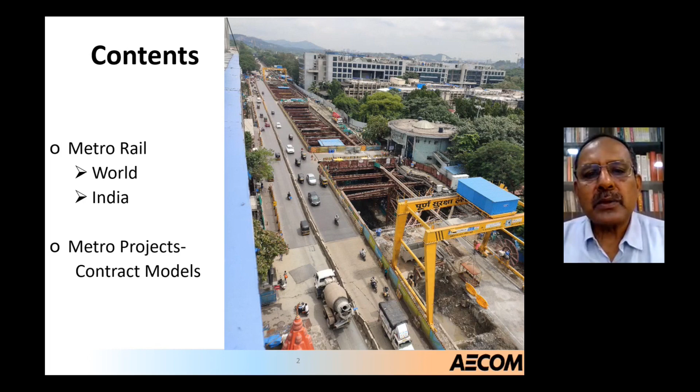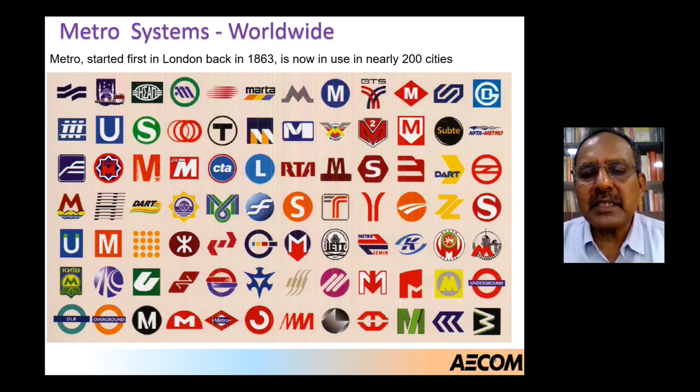So these are some of the logos of various metros. You can identify some of the logos which are very familiar to you. So this is Hong Kong Metro, MTR. This is Kowloon Canton Rail Corporation; now it has also merged with MTR. This is RTA Dubai. This is DMRC, or Delhi Metro Rail Corporation. This is the famous tube underground, London. This is overground, again London. So these are various metros. Over about 200 cities are enjoying metro rail transport.

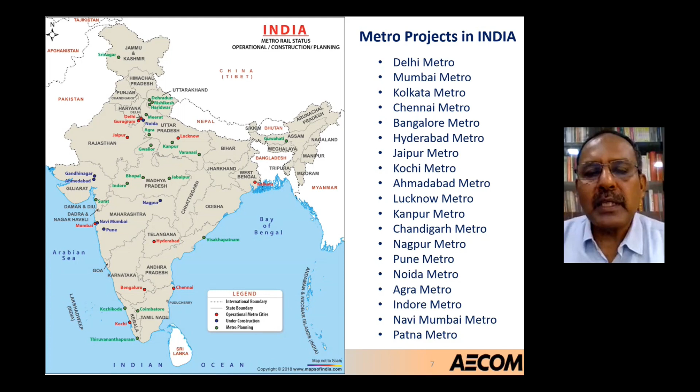Though the construction of metros in India started way back in Calcutta, it all became popular only two decades ago when Delhi Metro started. Calcutta used the conventional cut and cover system for the underground metro, both for tunnels and stations. So there were a lot of delays, but Delhi started using tunnel technology, TBMs, and so it picked up, and now it is going on in more than 25 cities all over India. So here is a list. I'm not going to go through every single item, but this is just to give a feel that things are happening in many cities in India now.

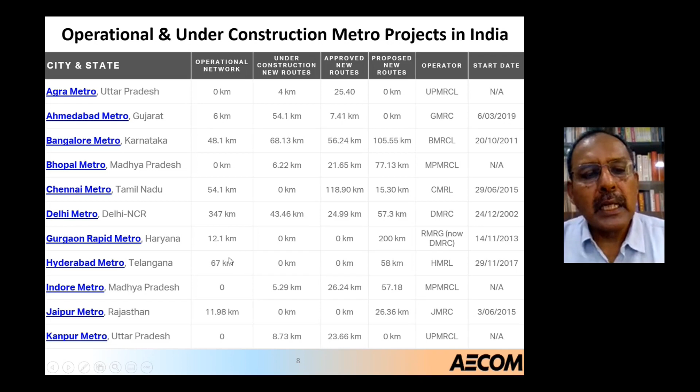The Delhi Metro, which I was talking about, is now comparable with any other major city in the world. It has more than 347 kilometers of metro, and construction is still going on. I am working for Chennai Metro, the southernmost part of India, and so many other cities. Hyderabad Metro is a unique metro which has run through the PPP model, and other cities are also gearing up.

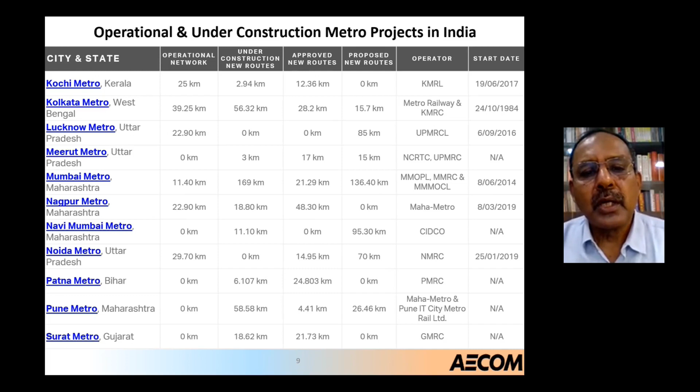So the list continues. These are either in operation or under construction, and the actual length in kilometers is listed here. Some proposed projects include Gorakhpur, Kozhikode, Nashik, Trivandrum, and Metrolite. For people not familiar with Metrolite, you might have seen light rail in other parts of the world - it is very similar to that. A more simplified form, the Metro Neo project, is also being implemented.

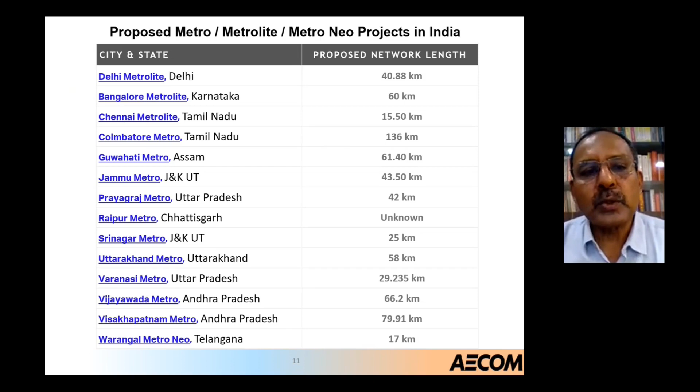Now we come to this, just to have a feel of how India is picking up in the metro rail industry. Today what I want to talk about is the contract models that are used in the metro industry.

So the conventional civil engineering works, the government department infrastructure projects, will have a list of contractors, and it is all engineer's design and bill of quantities remeasurement contracts. At the beginning of the job, normally detailed drawings may not be available, but there will be basic drawings with conceptual design and bill of quantities. So it is a remeasurement contract, and people are used to that and have been quoting accordingly.

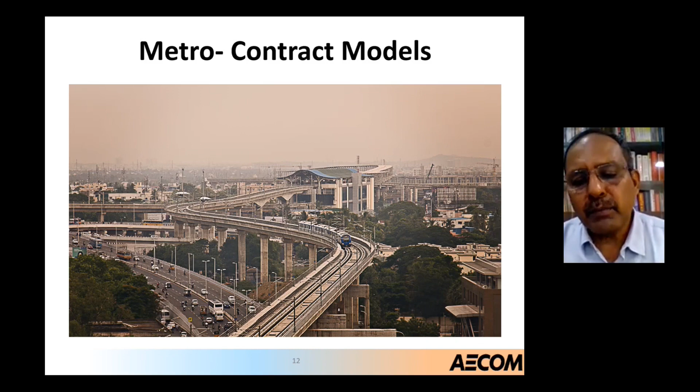But when the metro industry came in, and funding came from different international banking sources, this system had to be raised up, and different models started coming in.

We all know that in any big civil engineering project, there are different stages. It starts with planning and ground investigation, field investigation, and all associated things, and then the conceptual design, and then comes the preliminary design - some people use the terminology basic design for that. And after that comes the detailed design.

These are the steps required in design. We cannot straight away go for detailed design - let us go through the conceptual, preliminary stages, and during this there will be a lot of iterations, discussions, brainstorming, approvals, and then it will be finalized to a detailed design. Once the detailed design is ready, it is made into good-for-construction drawings, and it goes to construction and then operation and maintenance.

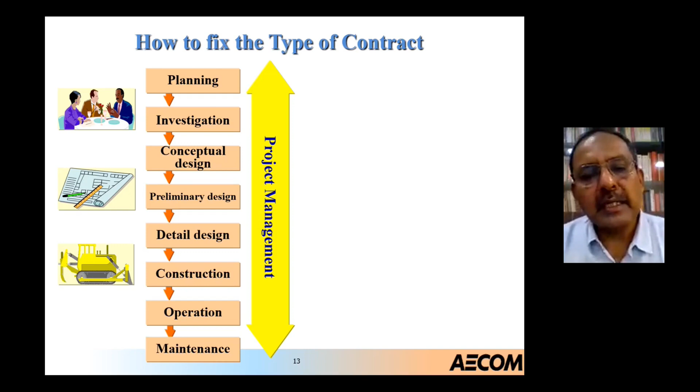So these are the various stages of work - irrespective of the type of contract, these are the items necessarily to be followed. We have to go through these stages, and we are going to talk about different types of contract, and these types of contract depend on several factors.

One is the capability of the owner of the project and the chosen contractor, and what are the technical difficulties. The bridge project is different from a tunnel project. A road tunnel is different from a sea tunnel, and it depends on the geology, the type of machineries used. So these are the technical difficulties, and there are a lot of uncertainties there.

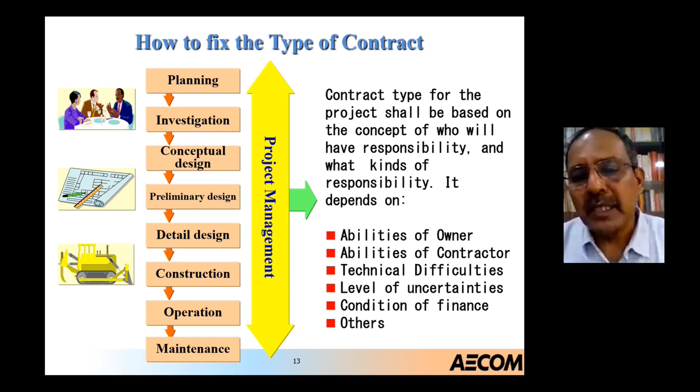Technically, and other external factors as well, there is finance - where it comes from and in what installments, whether the contractor is provided sufficient advance or has to mobilize his own funds, or advances or loans are provided, and what things are to be provided by the contractor to raise the money, and how these claims are covered. It all depends on the maturity of the owner, maturity of the industry as a whole, to decide what type of contract we have to choose.

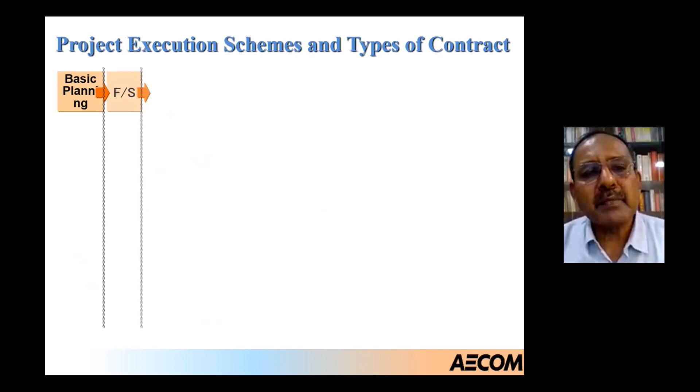So there are several systems. As we said, it starts with basic planning, field investigation, conceptual design, basic design, detailed design, construction, maintenance, operation - these stages are common for any type of project. And in what we call BOT, build-operate-transfer, or design-build-operate contract, it's also called a concession contract, in which the builder or contractor plays a major role.

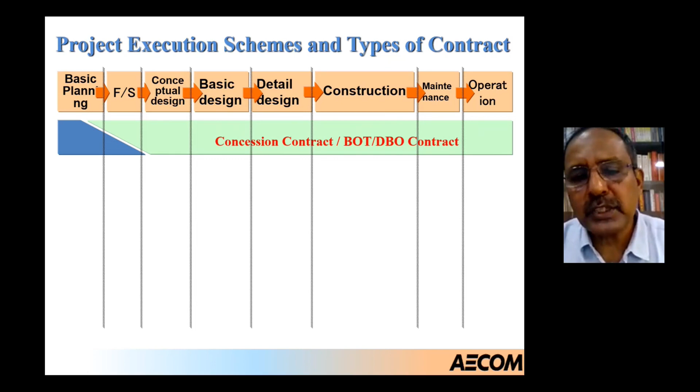As you see here, the basic planning alone is done by the owner, and right from the investigation, from concept design, basic design, detailed design, everything will be with the contractor, and he will also maintain it and operate for a period of time and then transfer to the owner. This is the type of infrastructure projects which we hardly use in metros.

In turnkey contracts or EPC contracts, basic planning, field investigation, and part of the conceptual design is all done by the owner. The remaining, right from the part of the conceptual design or from the preliminary design, the contractor takes over. This is also not very much used, but one example is tried in India, which I will talk about later.

So the design and build contract is very popularly used in India about 2 decades ago when the metro industry started, especially the underground contracts, where there are a lot of uncertainties with respect to ground conditions, because with respect to underground contracts, it depends on the capability of the contractor and type of the machineries he is using, type of the geology. It depends on so many things.

What type of tunnel boring machine is going to be used, what type of equipment is going to be employed for building his external wall or diaphragm wall, whether it is a grab or a trench cutter, what type of geology is it, and what is the contractor's capability. And if you don't have rock at a high level, what type of shoring system to be used - it's all mostly lying with the contractor's choice.

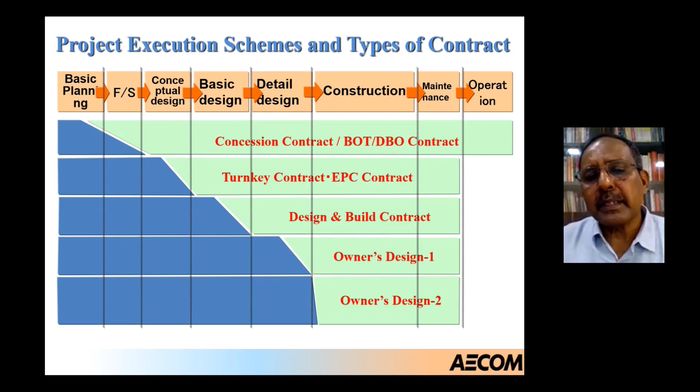The second one, which we have now tried in India for the first time in Chennai, is where the entire design is done by the detailed design consultant, that is the owner's consultant, and it is only a build-only contract. So both are under operation. This complete detailed design by the owner's consultant is not new in other parts of the world, but in India this is being tried for the first time, because the industry is slowly maturing. It started with design and build, then a hybrid of design by both owner and contractor, and now design purely by the owner or owner's consultant. This shows that the industry is maturing and owners are strengthening their teams.

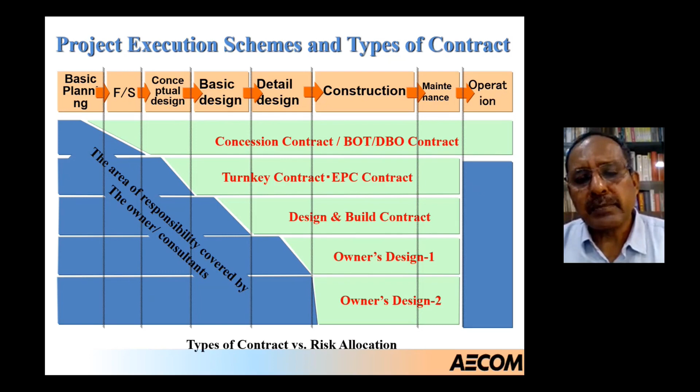So this is all types of contracts, and we talked about the risk. Now we go one by one. This is BOT contract or DBO contract. As I said, blue is for the consultants, and light green is the responsibility of the contractor. Here the total project management, design, construction, procurement, finance, operation management, everything will lie with the contractor. So the contractor has to be a full-fledged organization or firm which is thoroughly experienced and should have adequate technical and non-technical staff to run the design, the construction, procure subcontractors and consultants, and manage the finance, everything.

So normally this is a lump sum contract. You might get some money from the client, but normally in these BOT contracts, the builder will operate it for some time, like toll roads, and after collecting toll for 10 or 20 years as per the contract, he'll hand it back to the owner, who will take over the project. So the responsibility with the contracting company is much more in this BOT contract, but it's not new to the industry. However, the metro rail industry is not following this system because it's highly capital intensive, not like building a road or bridge and putting toll gates to collect tolls. So just for completeness of infrastructure project types, I have included this.

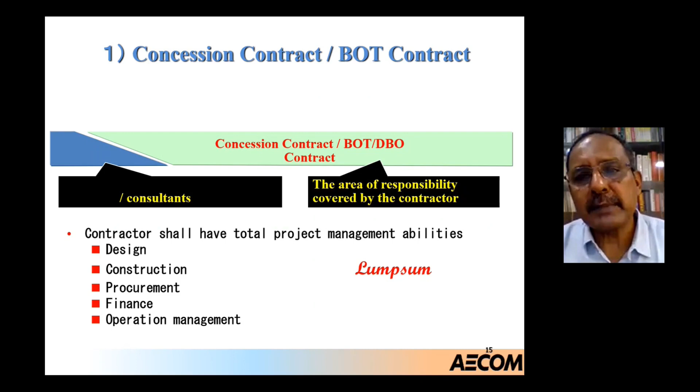This model again is not very popular in the metro industry due to the capital intensive nature of metro rail projects. But in Hyderabad, this model was used, what we call PPP. The government gave the contractor some government lands, and along with construction of the metro projects, they also developed those lands, built structures, developed real estate, and the revenue from selling or leasing it was taken by the contractor. So there was an arrangement between the owner and the contractor, and he engaged his own designers and subcontractors.

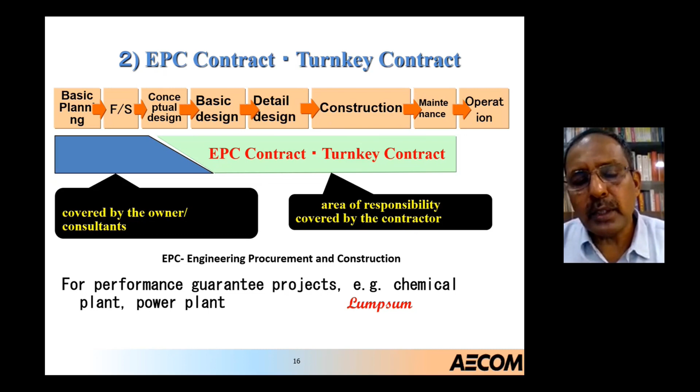So except for the operation part, starting from half of the conceptual design, this is done. In civil engineering, it's only used in chemical plants, power plants, those types of industries. But for one time it has been used in India, in Hyderabad, and the project is running very well, though it's not a very popular model owing to a lot of financial responsibilities and constraints.

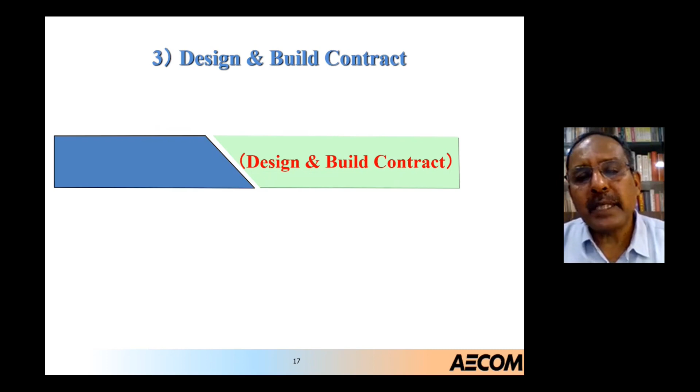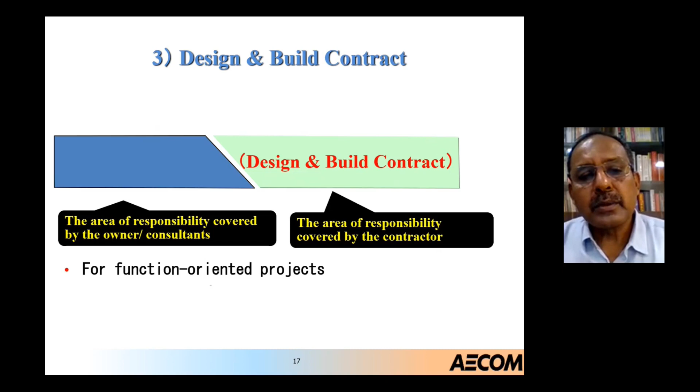So this is a very popular model, design and build. The contractor will do the detailed design and also the construction, and part of the preliminary design as well. As I said before, underground metros are using this. Basic planning, conceptual design, and a small portion of preliminary design are also done by the owner. But nowadays the entire basic design is also done by the owner or owner's consultant. So the detailed design, construction, and maintenance will be by the contractor. This model is time tested, but there are a lot of risk elements here.

What is that risk element? There are a lot of uncertainties with respect to the ground conditions and the type of machineries to be chosen.

So this is because, for example, if you're going down by 20 meters, unless you know the soil conditions and the geology very clearly, you cannot choose what type of external wall you are going to adopt, what type of shoring system you are going to adopt. So in places like Chennai, where the groundwater table is very high, we normally go for diaphragm wall.

And again, if the rock levels are higher, in the sense that the diaphragm wall has to pierce through the rock, then the normal grab is not suitable. Then we have to go for expensive trench cutters. So this type of equipment matters. So in design and build, these are some of the uncertainties.

Whatever is predicted by the client, if it is not adequate enough, or if it deviates at the site, there will be a lot of claims. Unresolved claims go to arbitration and the court. So these are the type of difficulties. But if you have a proper ground investigation record, a well-written contract, and all the available information covered and given to the contractor before the start of the work, these claims can be reduced.

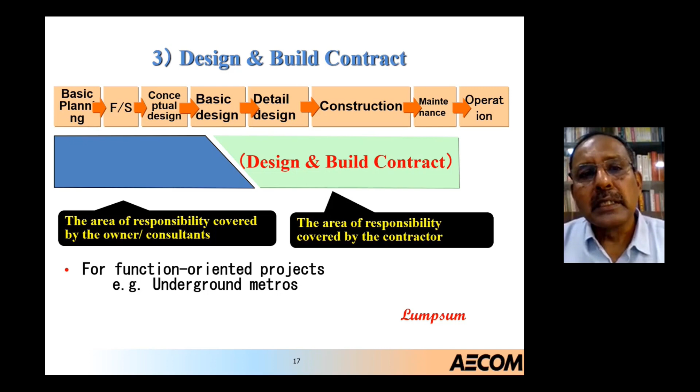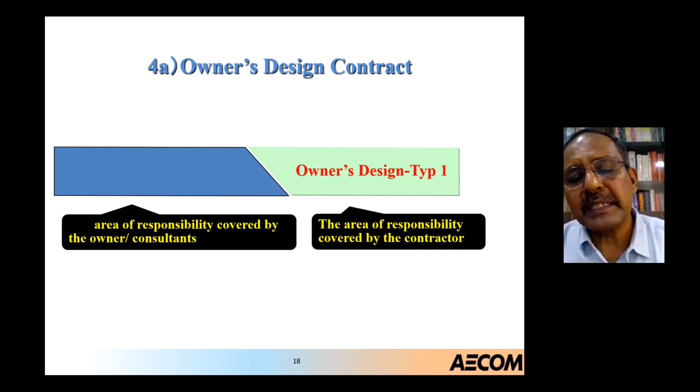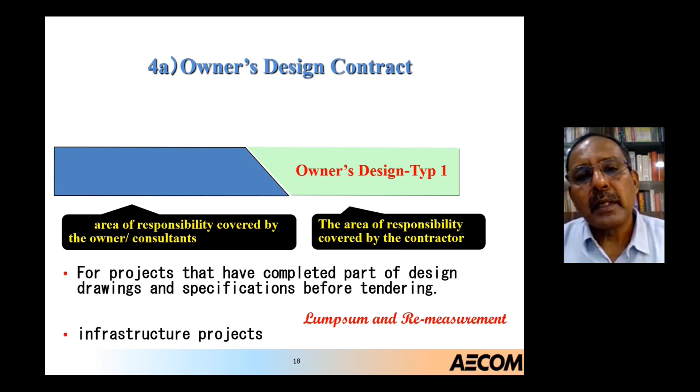So now we go to the fourth model, the owner's design contract, type 1. This is being used in many cities in India, because after going through design and build and learning for over 2 decades, many metro companies or owners, the government-run or quasi-government metro rail companies, go for the hybrid. That is, part of the design will be done by the owner before starting: basic design, and detailed design, some by the owner before commencement and some by the contractor.

So here, as I said before, for the underground part, the tunneling and underground stations, the civil and structural engineering detailed design will be given to the contractor, and the remaining architectural design and MEP design will all be done by the owner's consultant. So that is how this is divided.

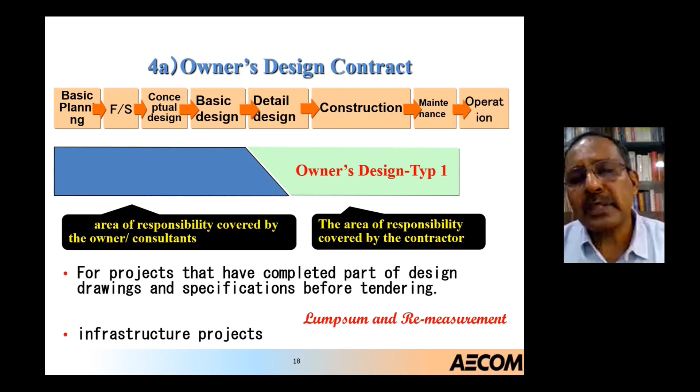And again, it can be lump sum and remeasurement. The pattern used is: wherever you're giving the complete set of drawings, the owner's design will be remeasurement, and the contractor's design part will be lump sum. Again, that element has an overlapping risk, which can only be overcome by good homework before the commencement of the project and a matured industry, as I said.

So this is the owner's design contract, which, just for convenience's sake, I'm calling type 2. Here the entire detailed design is done by the owner's consultant, and the contractor has only a build-only contract. So here again, there can be two models. But in the case of underground, there are a lot of elements.

If it is purely elevated, we all know that the industry, especially the Indian industry, for the last 70, 80 years, has been building bridges, not metro rail bridges, but any type of bridge, precast or pre-stressed, high, long span. Infrastructure contractors are very familiar with all bridges. They have been doing that for quite some time. But in underground, the experience is relatively less.

So initially, expatriate experts were hired, but now the industry has grown. But the underground uncertainties are still there. So at AECOM, the company I am working for, we were the detailed design consultants for one of the 3 corridors of this underground metro.

And what we did is we completely did the ground investigation for the station, tunnels, everything, at very close proximity, and we ascertained the ground conditions, and accordingly we fixed what type of permanent works to be done, what types of temporary works to be done.

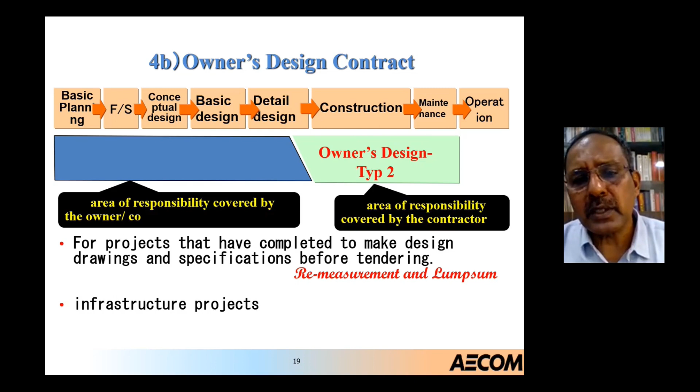The international contractors are very familiar with this owner's design lump sum contract. But for local contractors, we had some road shows and pre-bid meetings to explain what is expected, and no issues. People understood very fine, and the quotes are coming in. We are all very familiar with the FIDIC conditions, so I'm just going to run through very quickly before ending my presentation what are the types of FIDIC models that are being used.

So what we talked about is BOT, build, operate, transfer; EPC, engineering, procurement, and construction. The third one is design and build. And the last one is build only contract or owner's design contract. And tender types can be either lump sum or remeasurement. Both have advantages and disadvantages, depending on what type we are using. Generally, BOT, EPC, design and build are lump sum. And build only can be both lump sum and remeasurement.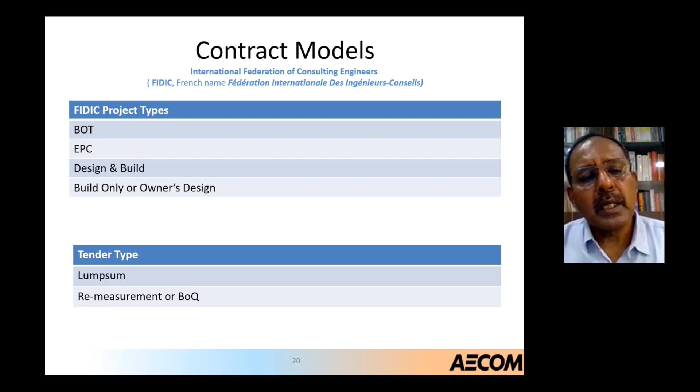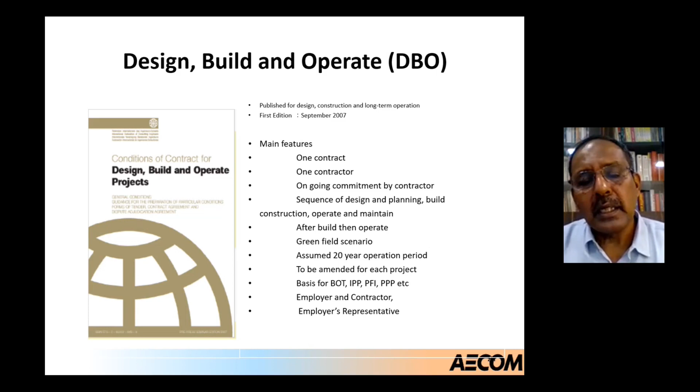And EPC is for power plant type of projects, turnkey projects, not very popular for metro rail projects, but as I said, in one odd project it was used, and as it was very well planned, it went on very well, no problems, but it's not a popular model. The risk for the contractor is more here.

But that is how this contract is built. The engineer is not involved in day-to-day design and construction. So it is more of a performance sort of thing. That is why it is more suitable for power projects or oil and gas plants, where the final product can be assessed and you can confirm whether it is adhering to the required standard or not, which is not very much acceptable in case of civil construction contracts.

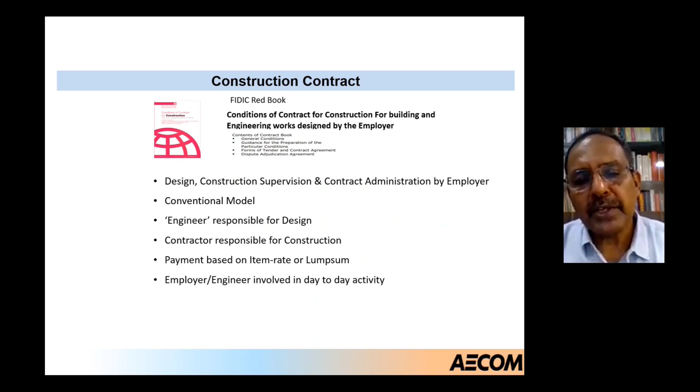So there is this engineer's design or owner's design, or build only contract or construction only contract, and that is covered by the Red Book of FIDIC. The payment is based on either item rate or lump sum according to the contract, and the employer's representative is the engineer. He's involved in day-to-day activities. Of course, design is done by another hand of the employer. So the engineer's job is mainly to see that the construction is done according to the design, and if at all there is any variation, he has to manage it and see that the project goes on fine.

So these are the different types of models which are being used in India and other parts of the world.